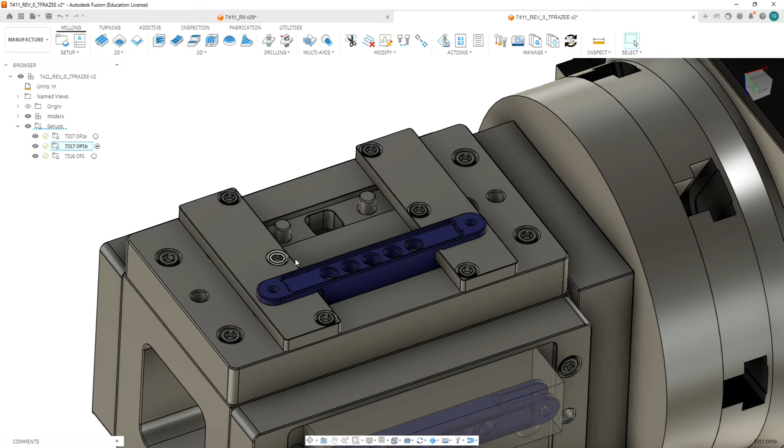Okay, I only have one instance of this part showing, but I do want to comment. It's going to locate on these two dowel pins. If you look at it, when we program the parts, we're going to ream out those two holes because they're location holes, so they're going to be higher tolerance than these other ones. But there's this pocket in the fixture.

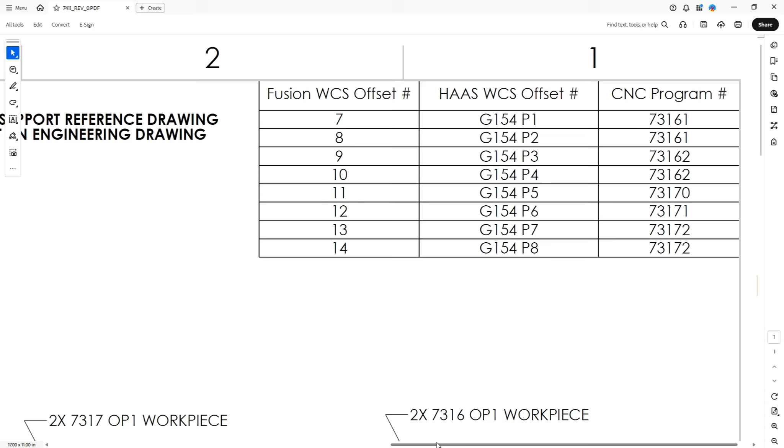Our origin is going to be basically on the center of this hole on this plane, as is shown on this drawing here. So our origin's right in the middle. The bottom of the pocket is our Z location. So the only reason that pocket is there is so we can get in there with a probe and find center of it. Let's set up this operation, and we're going to do this different.

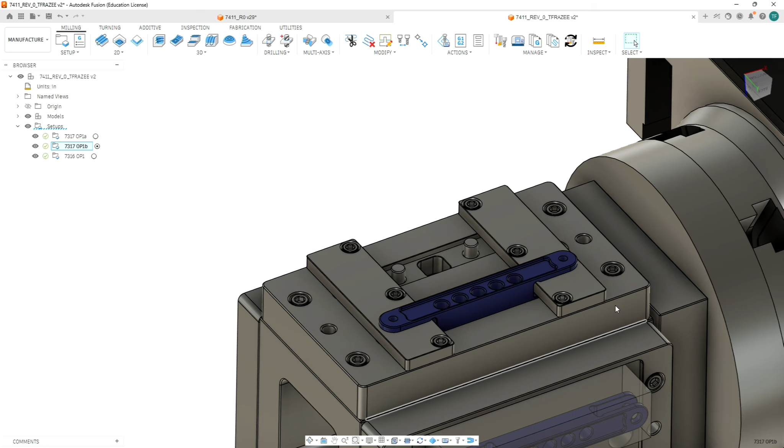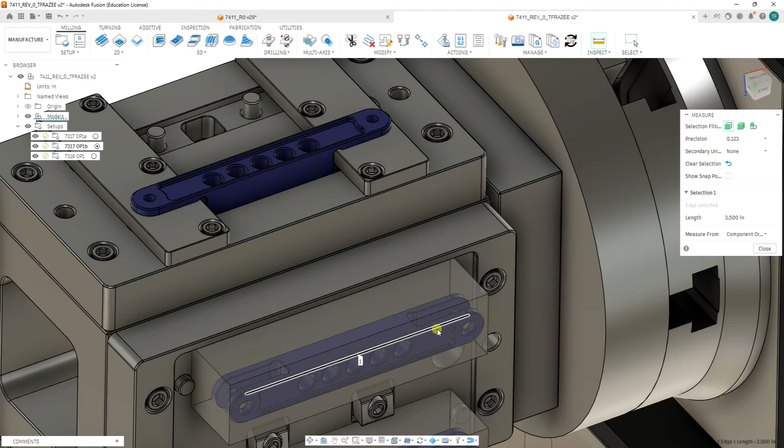We already know what our stock size is. It's here. We know how much material we're removing. So the overall part is 1/2 inch tall, and we started with the material that's in between here and here. So if it allows me to measure that distance, that distance is 0.38. Setup, do new setup.

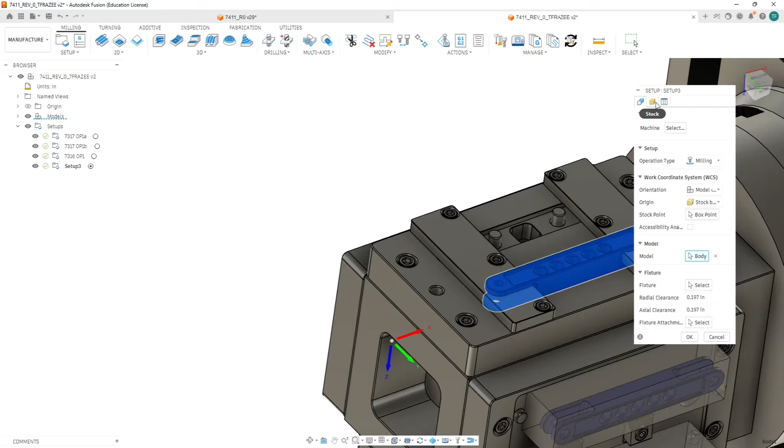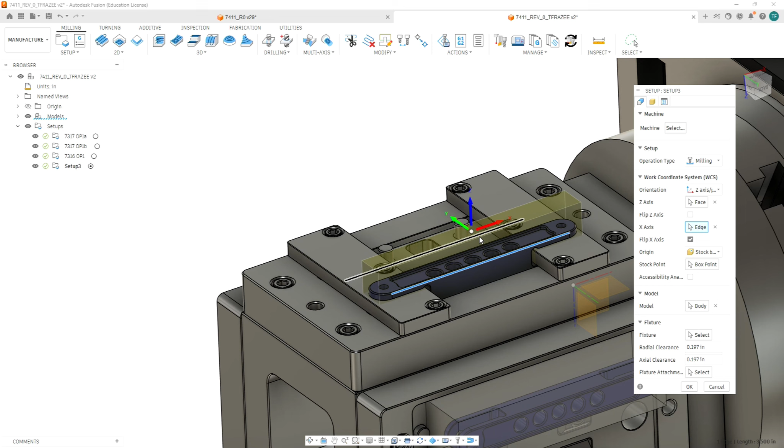Okay, in our model, we're going to select this model here. After we've selected our model, we're going to go to Z plane and X axis. We're going to set our Z axis in orientation so it's pointing up and our X is to the right. Let's go ahead and select something for the X axis, and you might have to say flip. Again, we want the red arrow pointing at the rotary.

We're going to go to the next tab, and we're not going to go from the previous, but we're going to go to relative size box, and then we're going to add stock to all sides. Now we're going to type in some values to have this box the size we want. Our stock depth right now is at 1/2 inch, which was actually 1 inch bar stock. So we're going to add to Y 0.25 and 0.25. So our bar should get wider.

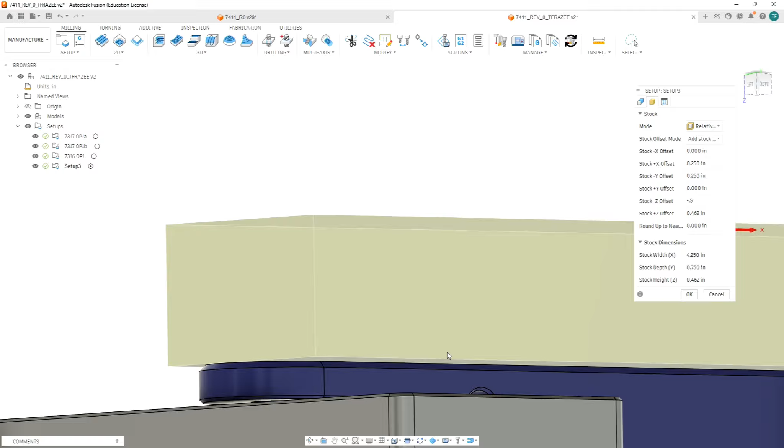Now in the Z, we basically have a hat on the top. So we should be able to put in a Z negative offset, negative 0.5 in Z. And so that'll bring the material up to where the top of the part is. And again, it started out as a 1 inch bar, and we took 38 thousandths off the opposite side. So our stock to remove in Z should be 0.462.

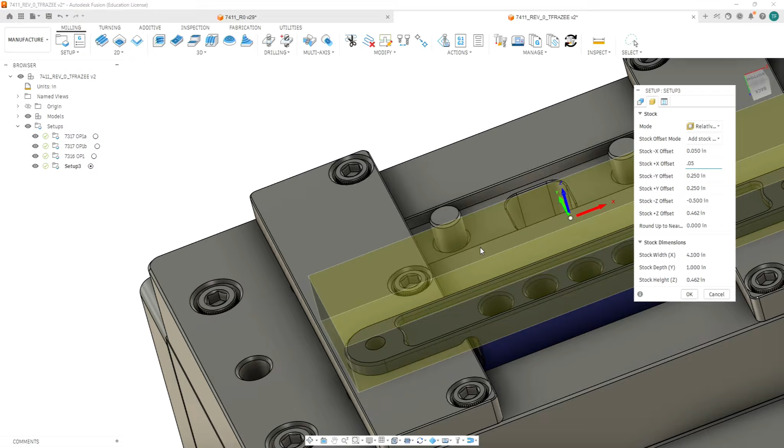So our total numbers on here, I'm sorry, I made a mistake here. This 0.25 should have been in Y. Our X-axis offset is 50 thou per end, because our stock was 100 thou longer than the part. Okay, so some of you are used to doing meshes. You could do that. It should come out with the same result. This is fast. It's easy, as long as you got the math right.

And most of what this operation is on this side is removing the hat, which is substantial. We had to have it stick out quite a bit so that we could cut the slots in the side. It's basically going to mill the top of this off and then cut the holes from this side in the pocket. Now on our last tab, we're going to put in 7317, program 2,

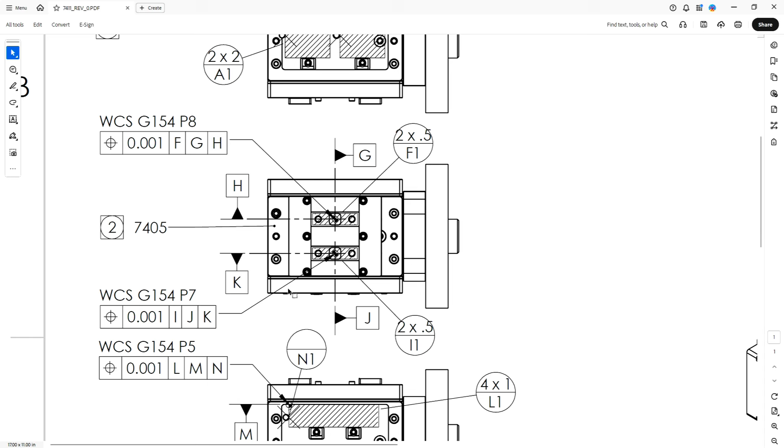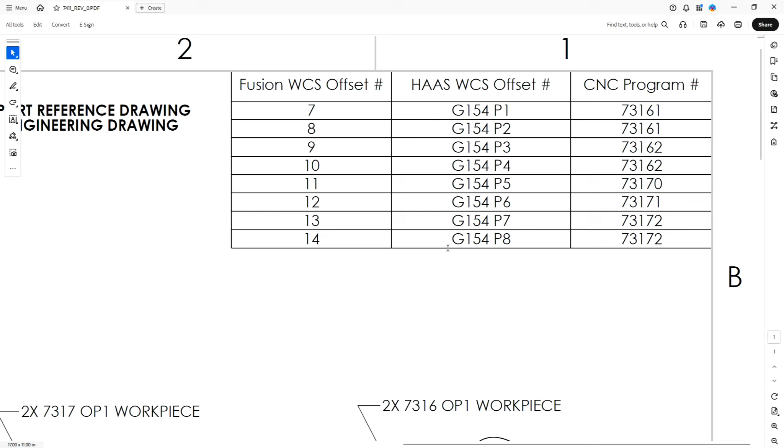7317 op2, and for our coordinate system we're going to use multiple work offsets. We're going to do 2 instances, increments of 1, and we're going to do order by tool again. And then we need to look up what our starting work coordinate system number is from our drawing. So if we go to our drawing, our first one is P7 and then P8. So our starting number, P7 is 13. So we want to start at 13.

So it'll output 2 instances, and we'll set our origin for the second part where this cavity is. Now that we have all that set up, I've noticed I didn't set the origin in the correct place.

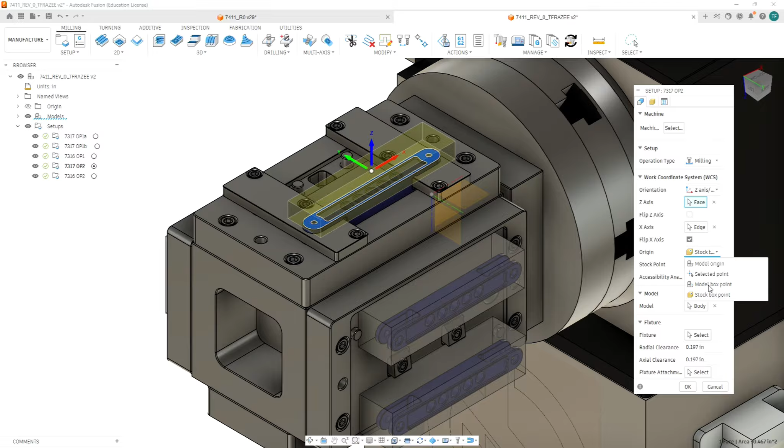So we're going to go back to the previous tab for the setup, and we don't want it on a stock box point. We want it on a model box point, and we want to select the one that's at the bottom center of the part, right here. Make sure that's where it is, or your part's not going to come out right. It's the center of the pin, very bottom of the model. That'll center it, and it's a symmetrical part, so it doesn't matter how it's loaded.

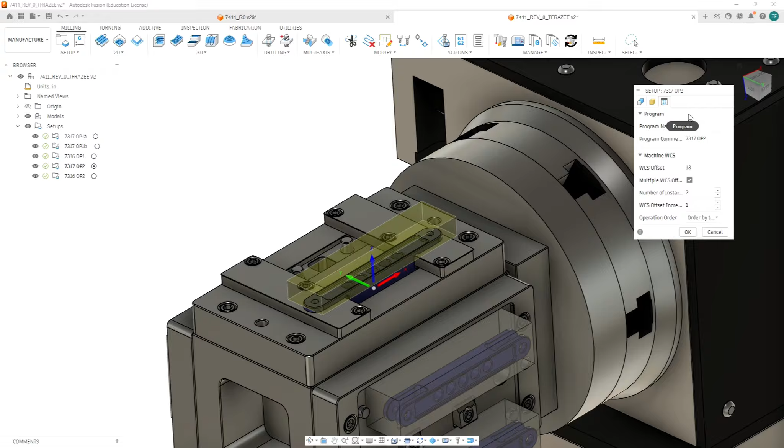That's why we can do just an array straight over with this one, because there's no side work. It's symmetrical. Alright, so we're going to go to the post process tab and then double check all this. We hit OK. 7317, op2.

Now we just have one more face to work on, and that's finishing off the bracket. So it's going to be machined around the outside, goes up against a fence and a pin, but it's the same thing. We're going to have material above here that was minus what was removed from the opposite side.

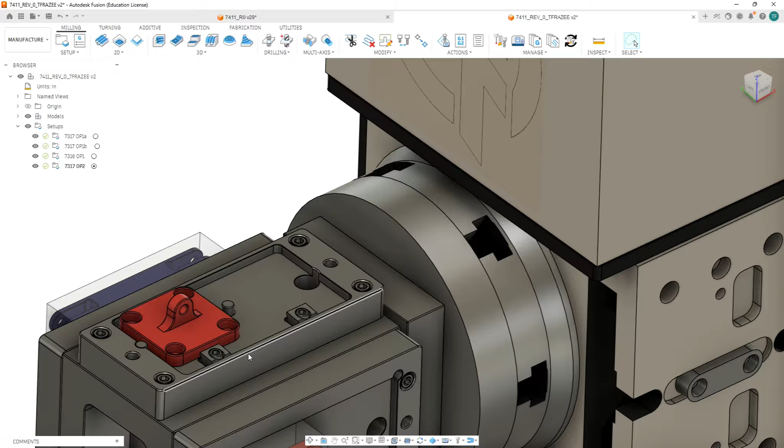So if we look at our other model, and if it allows us to measure, we're going to take this edge and this face, and it looks like we got a 40 thou difference. Our stock was 2 inches in one direction, and it's 2 inch 60 in the other. So that's what our end stock needs to look like.

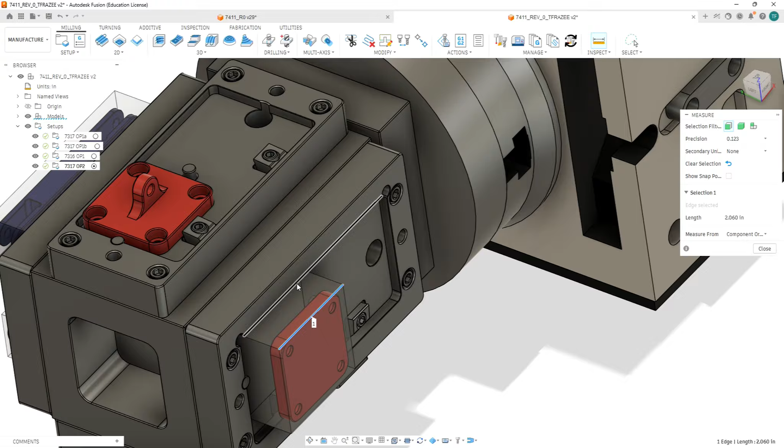Okay, so we're going to select a new model. We're going to pick this red one here. We're going to change our orientation to Z-plane and X-axis. We're going to pick on. Okay, we flipped our orientation.

We're going to go to stock. We're not going to use from previous. We're going to go to relative size box. That pops it up here. We're going to adjust our stock size to be the size we want. So we're going to go to add stock to all sides. It gives us the freedom to adjust.

We're going to put in the y-axis, we need an 1/8 inch because it's 2 inch bar. So we need to put in a 1/16 per side. So our number for y should be an even 2 inches. And our width in x was 2 inch 60. So we're going to go this number plus 30 thou. So it's going to be 0.0925, and we should have 2 inch 60 in the other direction.

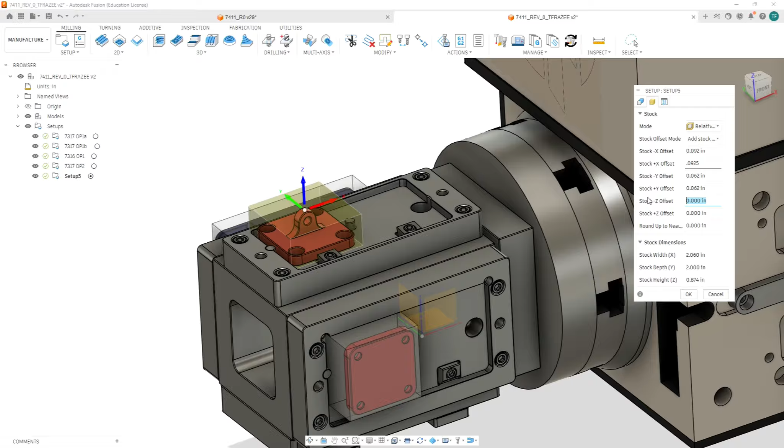Now our stock height, we need to go less the thickness of this flange here. So on the Z offset, we're going to go negative 0.281, which should bring us up to the stock that's actually left on the part. Okay, so this is auto calculating based off the height of the model.

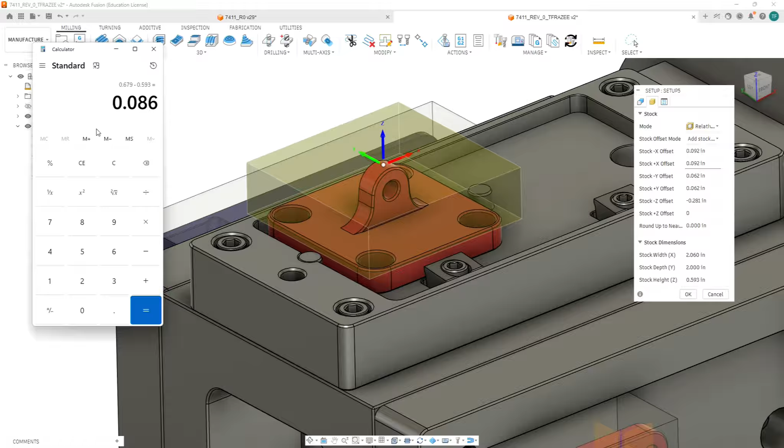We started off with 1 inch thick material, and we removed some material off the other side, and then we have the thickness of our flange. So if we do the math, we start off on 1 minus 0.281, that's the flange, minus 40 thousandths of removal on the other side, minus 0.593 for the height of the overall model, gives us an offset of 86 thousandths.

Okay, so now where's our origin? It's going to be based off a model box point. It's going off machined edges. That model box point's this bottom left corner here.

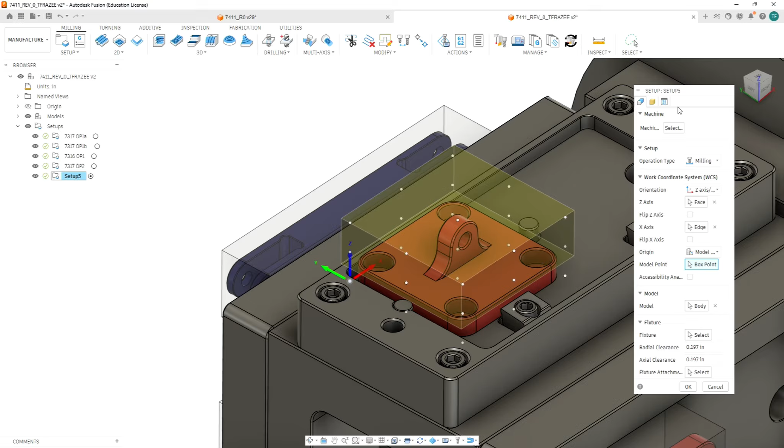Okay, we're going to go to the next tab. Stock, everything should be good. Go to the next tab. We're going to put in our number 7316, program 2. 7316.

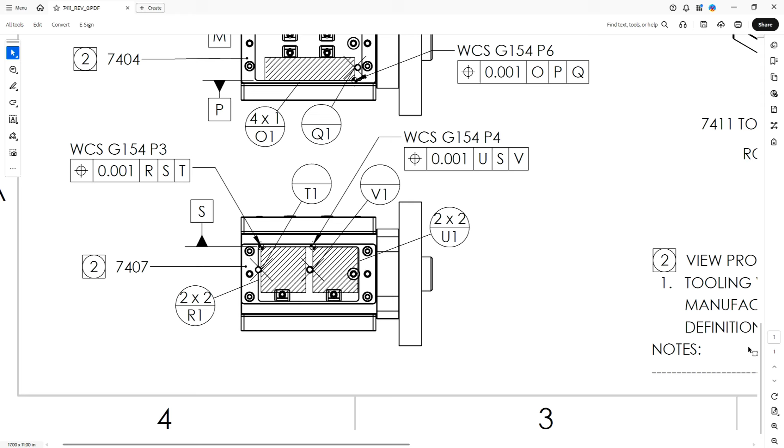Op2. And our work coordinate system is going to be, our starting work coordinate system on this fixture is, we're doing P3 and P4, which is 9 and 10. So our starting work coordinate system is going to be 9. We're going to check multiple work offsets. We're going to do 2 instances in one increment, and we're going to go to order by tool on that one as well.

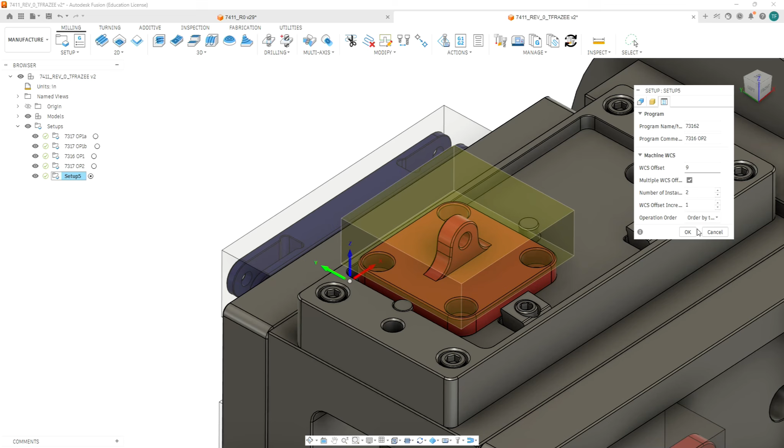Let's go ahead and hit OK. Then we're going to change our setup 7316, op2. Okay, we're going to do a little bit more editing of these operations before we move on.

First thing is we're going to right click on and edit operation 73171A. And I've decided after running setup sheets, it'd be better to have, instead of 1A here, put location 1. That will show up in the code in the setup sheets.

And following suit in 1B, we want to label that one location 2. Now, what we're going to do in the first operation is we're going to 1A, we're going to program everything for that location, and then we're going to copy it and put it in this other one and regenerate it on the second location.

Again, the reason we're doing this is we're going to be cutting the slots from the side, and there's not a good way to mirror rotate this and keep the origin where we need it to cut the slot on the second piece. So unfortunately, we got to do a little more programming than we will have to do on the other operations.

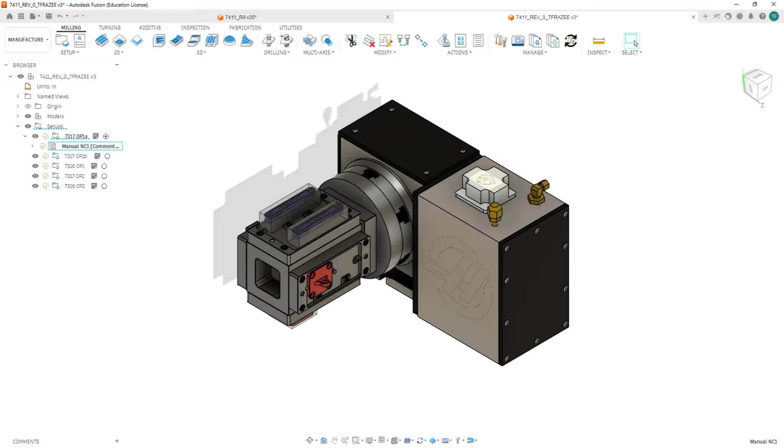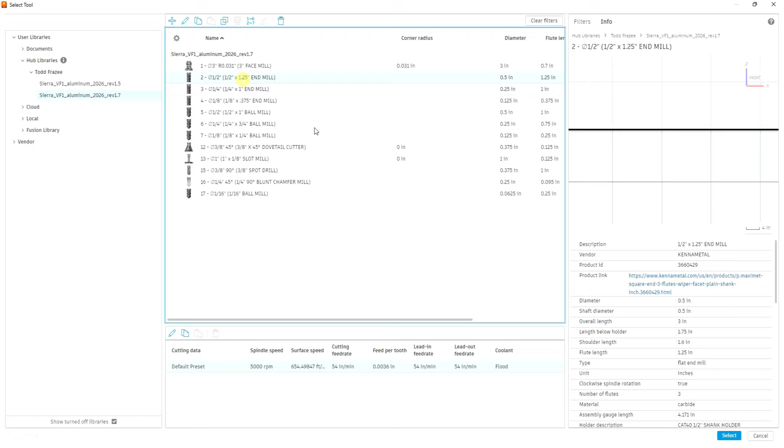Alright, now our first operation is going to be a facing operation. We're starting in the neutral position with these two locations here. So we're going to do a 2D face, and select our 1/2 inch end mill from our library.

This is a facing operation, standing far away. One way to take a little bit of torque off and get a better finish on a setup like this, as long as it's rigid enough, is to bump up the RPM. So we're going to bump up the spindle speed and the ramp to 6,000 for this operation. We're just skimming a little material off, and this might chatter later, so we want to make sure we're leaving the rest the same.

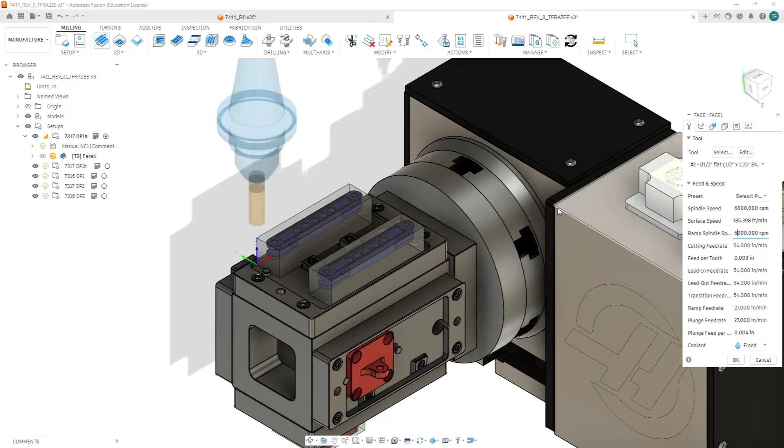Again, this is a 3-axis move. We're in the neutral position. You are going to put in 0 for rotation on this offset, since that's where the neutral position is. So there's nothing to put in for tool orientation in this case.

We're going to go to geometry, and just take the stock as it was set up. On the heights tab, we're going to leave pretty much everything at default. We want it at stock top, based on that.

Then we're going to move on to the next tab. We're going to set a pass extension of 270, just to make sure we clear it, and if our stock ends up a little larger than we anticipate within its tolerance, we've got some extra room there. Our step over is going to be 250 — a little conservative, because it's a narrow part. That's it for this tab.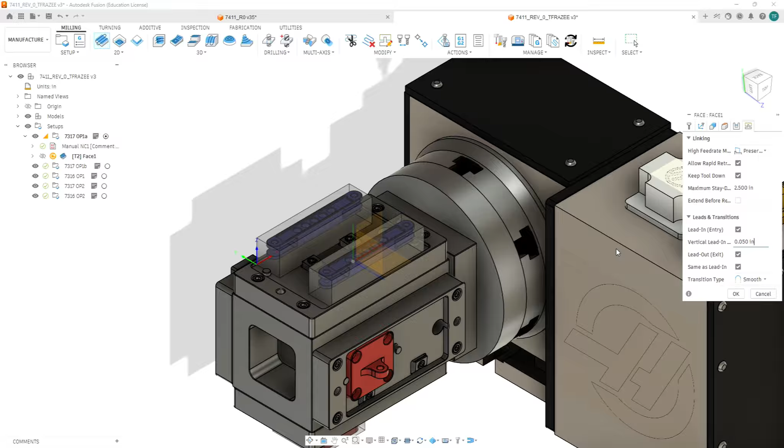We're going to move on to the linking tab, and take away our vertical lead-in radiuses. That's going to be set at 0, and we're going to hit OK.

Okay, so it should be milling down from the top surface. It's going to lead in towards us in the center and then work its way out. Let's pick on the model, and it'll highlight where it is for us — and it's in this model here.

It ended up being part of our setup for the part, so we want to keep expanding until we see bodies, and then make the 2 stock volumes invisible now that we've set up our setups. Alright, let's go ahead and collapse all this back down, and then we'll proceed with our pocket.